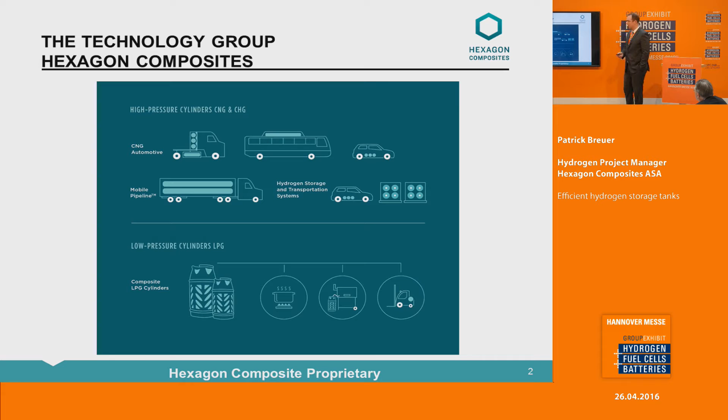But nevertheless, low-pressure cylinders, LPG, are from the historical point of view a very important part of our company, and we provide products to serve all different usages from your barbecue to other applications with LPG.

If you look at the different locations and production sites, Hexagon Composites basically is spread all over the world. The headquarters is located in Ålesund, Norway, but we have also in Norway 2 production sites in Raufoss, which care about the high pressure cylinders for CNG and hydrogen, as well as the low pressure cylinder production.

In the USA, we have another important production site in Lincoln, Nebraska, which is the site with the highest number of employees. They also concentrate on high-pressure cylinders for CNG and hydrogen. The latest entry in our family is a site acquired in Brazil, which hopefully will enable our market entry in South America and the opportunities for hydrogen as well as CNG applications there.

On top of these production or office sites, we also have sales representatives all over the world, in Europe, in Asia, to be the contacts for the customers and serve as a first contact for everybody who's interested in our products. Overall, we had around 430 employees at the end of last year.

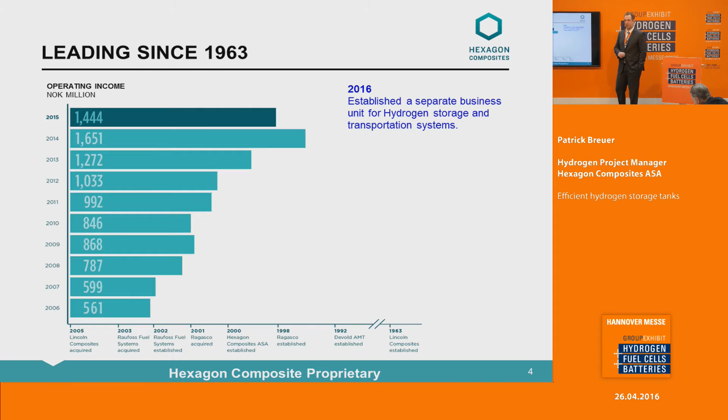One important part of it was that this year we created a separate hydrogen business unit. I will come to this a little later, but this is a strong sign that Hexagon Composites sees hydrogen as a very important future product.

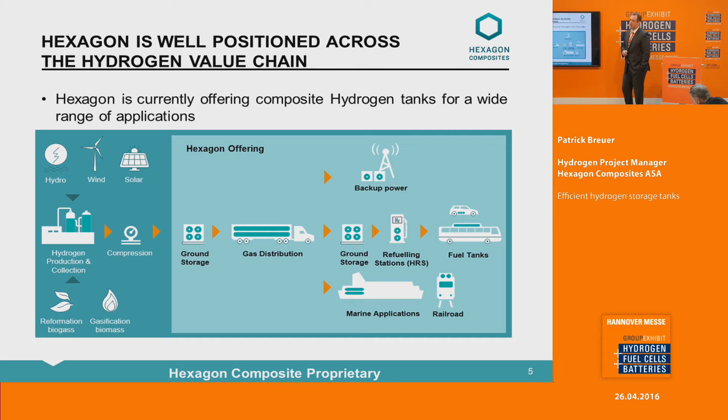Therefore, we would like to have our products spread over the whole chain, from the generation of the hydrogen over the storage to the transportation and finally the usage. That means ground storage, transport, and also the different applications. We would like to have products available for the customers. Here are just some pictures of already available market segments in our portfolio, and I will give you more information on the next slides.

Of course, one important market segment is the fuel cell vehicle market. There's always a lot of discussion about what should be the future source for the electric vehicle. Should it be battery or should it be fuel cell?

Even if we are not directly involved in battery technology, we still think this is a common goal, and both will have their market shares, both are important to exist, and will bring forward clean drivetrain technology. Both technologies have their disadvantages and advantages, so both will have their region or area where they can be successful.

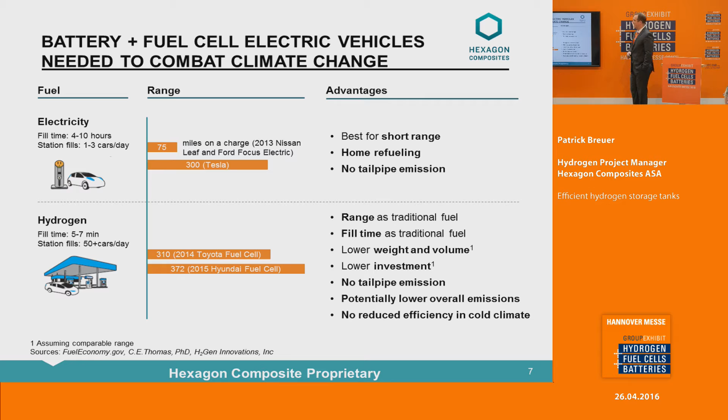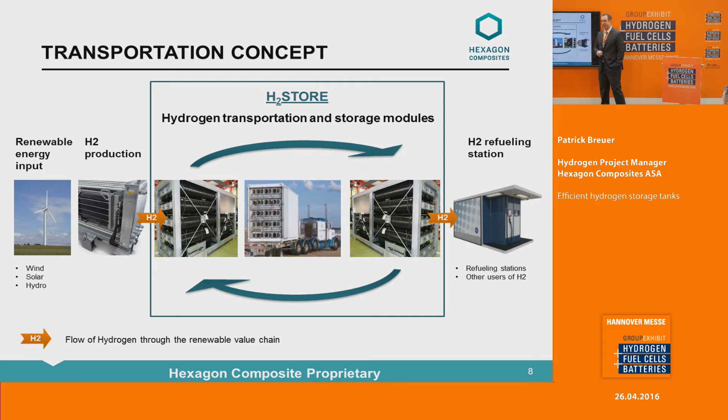If you look at the transportation storage, it of course would be the perfect solution if we have the hydrogen produced by renewable energy, then stored for, let's say, a certain amount of time till it can be transported to, for example, the filling station or wherever the end customer will have their applications. And ideally, this is done by just one module, which can be stored at the production site, transported to the usage, and then also stored on site of the final usage.

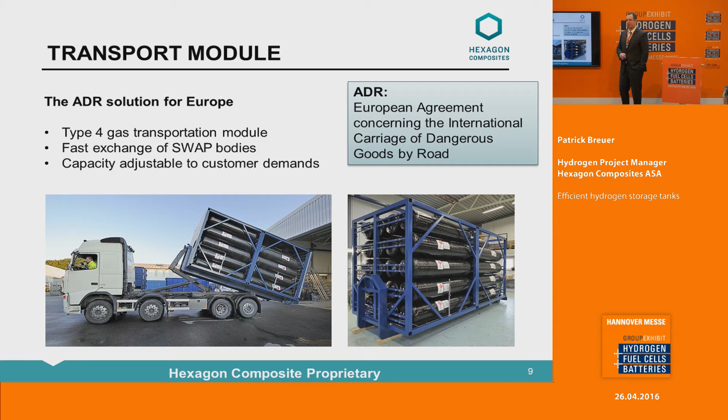And therefore, we have, for example, this transport module developed, which is also, of course, certified according to the ADR, which is the regulation for transport of dangerous goods in Europe. It's a Type 4 tank cylinder storage module, Type 4 with the plastic liner as a permeation barrier. You have the capability to easily transport or locate it on site due to the swap body structure. But it can also be adjusted to special customer needs if necessary.

These are just some values of what a typical SmartStore module can store. We have about 40 cylinders, which gives us a water volume of around 18,000 liters with around 320 kilograms hydrogen at a working pressure of 250 bar. This can be combined, so we can add one or two modules of the 20-foot containers to increase the capacity. And we work with different suppliers on the framework to enable this solution.

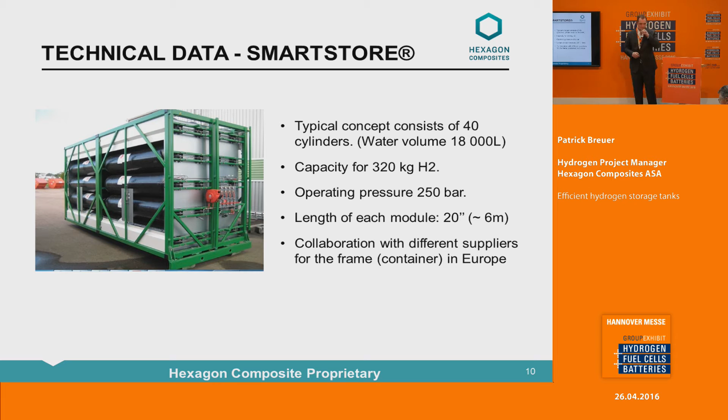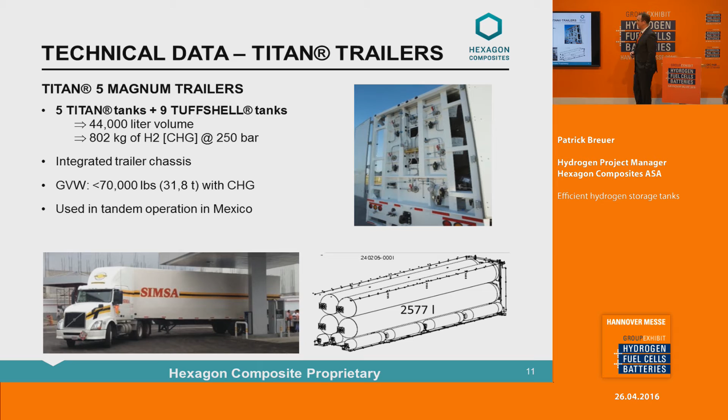As said, this is not in use in Europe, but in the United States, and even in, for example, Mexico, you will see this as a tandem operation. So 2 of these trailers are hooked after each other to increase the amount of gas transported at one time.

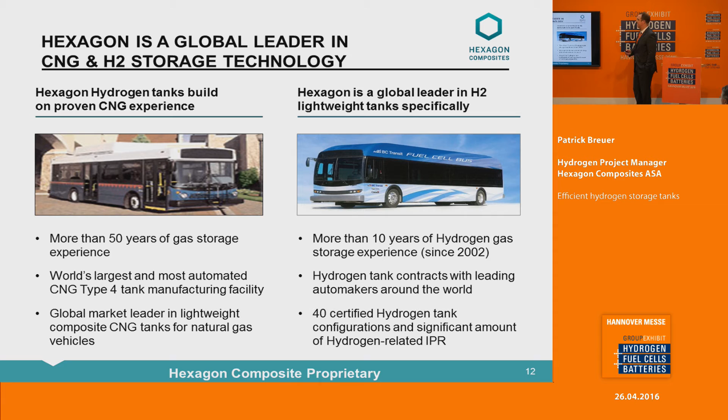Besides the transportable solutions, we of course also look into the final application. Bus storage systems have been a key competence at Hexagon for many years. We have been providing CNG systems to the market for many years already, and we can gain from that experience and the discussions and cooperation with the OEMs in the bus segment, and also establish the hydrogen products in this area. We have been working on that technology for several years and have several tanks certified, always looking for new solutions and increased storage capacity to meet the demands of the customers and also of the market.

If you look into new markets, the backup power application could be a potential growth market. There are a lot of countries that would like to establish or have already established backup power in case you have a loss in communication due to grid outage. Many times it's powered by batteries, but the operators have already evaluated that the hydrogen backup power solution is a more reliable and also more cost-efficient solution. And depending on the location of the backup power, sometimes it's on hills or remote locations. You have to transport batteries or hydrogen tanks, which are much lighter and also less costly, to the locations. And this is definitely an advantage of the hydrogen backup power solution.

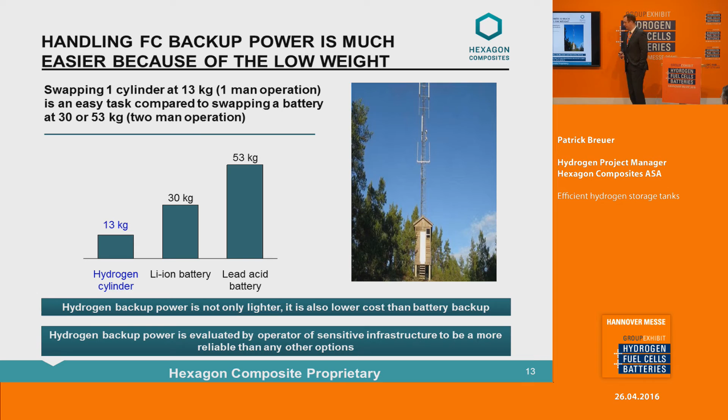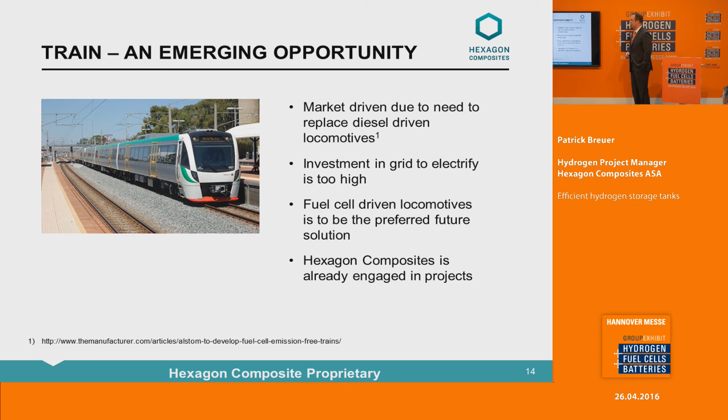Another topic which is more in the discussion are train applications. In every public transport area, they are looking for alternative energies in the train area as well. We already have a high electrification of the train segment, but still some areas where we have to replace the diesel drivetrains with alternative propulsions. And there's of course a reasonable discussion ongoing to exchange these drivetrains not with battery but directly with fuel cell powertrains, and of course then hydrogen is necessary for onboard storage, and we have products available here as well.

Another niche market we hope will get some more opportunities is the marine application. There are already some prototypes available, like the canal boat in Holland, which is already operated with hydrogen tanks from Hexagon. But here too, more and more renewable energy is the goal for the future, and replacing the fossil fuel drivetrain with batteries could be an option, but for that, high power filling stations or high power stations to charge the batteries are necessary, which is again a little bit difficult, I guess. When we have a hydrogen economy coming up in all areas, larger scale hydrogen filling stations can be available for marine applications too, and here we already have products available for that market.

To give you some ideas of our product range and what we can provide on cylinder sizes, we have here some different cylinder sizes available. I start with the transportable cylinders I've mentioned in the SmartStar module with rather low pressure. Then we have the heavy-duty applications, which start with 350 bar working pressure, rather large, long tanks used mainly on buses, but also other heavy-duty applications.

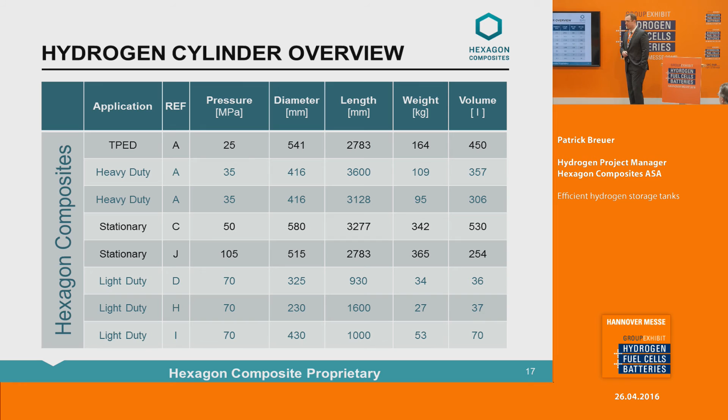But also for the fuel cell vehicles, we have different solutions already certified and available. So this can be purchased by the customers and used in their application as well. So to give you the overview, for the different applications we have products in place. Of course, the largest market potential we see in the light duty and bus truck market. But definitely, when we increase the hydrogen economy landscape, also other market niches like backup power or gas transport will come in place. Infrastructure, of course: without infrastructure, no fuel cell can be operated. So here we also see in the growing market a very good opportunity.

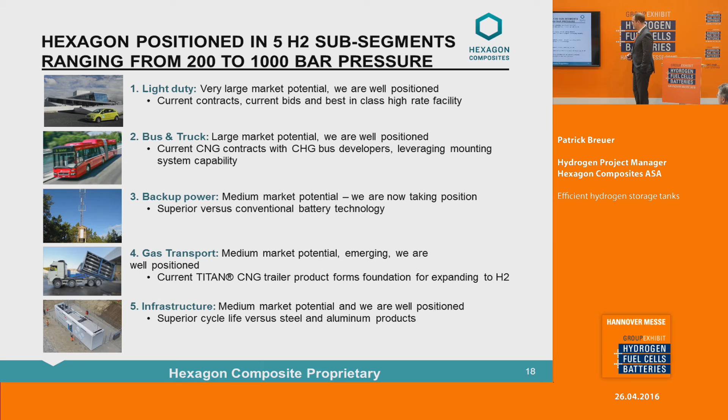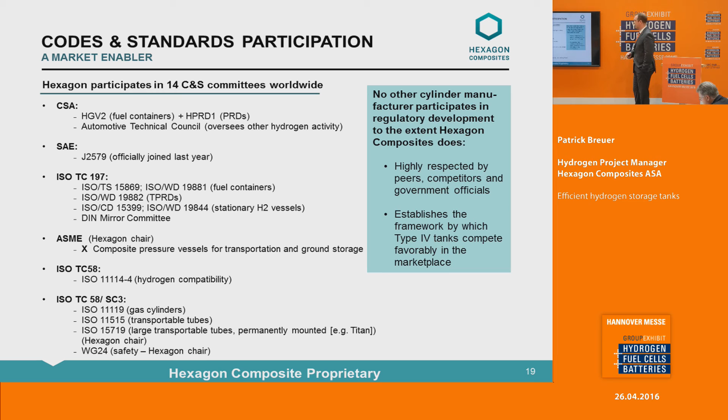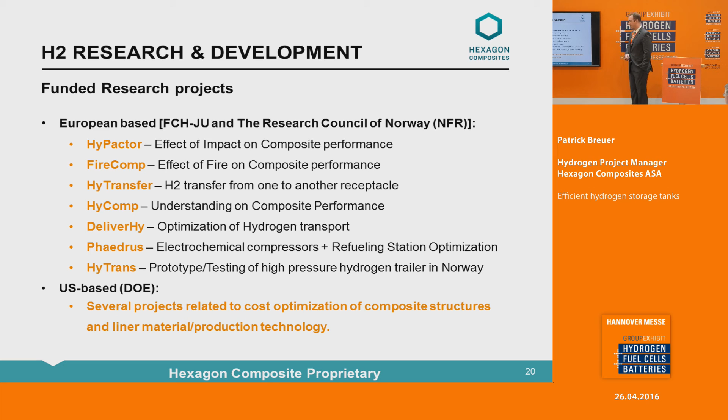Furthermore, research is a very, very important part of our strategy, because if you don't do new developments, if you don't improve your products, you will sooner or later lose your market. And so we are heavily involved in European funded projects, mainly funded by the Fuel Cell Hydrogen Joint Undertaking, but also by the Norwegian Council, and also from the DOE side we are involved in several projects as well, all dedicated to improving the product or understanding important safety aspects like impact, fire, or other means.

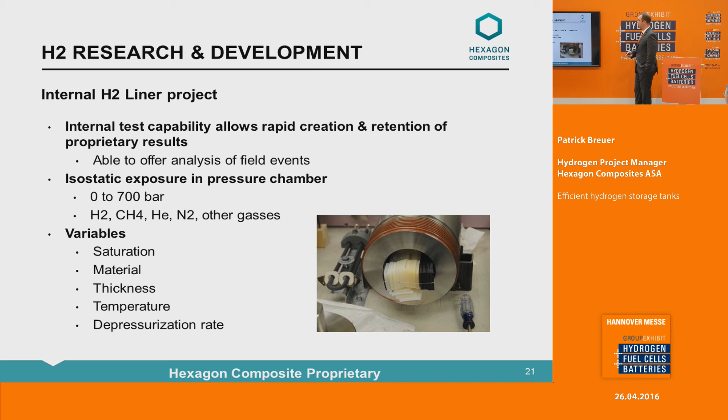So finally, to summarize the activities at Hexagon: very important for us, we have established a separate business unit for the hydrogen activities to have a growth in the niche market, but of course also strengthen our current already available market applications. We see that still the fuel cell vehicles have the highest importance and will be the most important market for our products. But as we increase the hydrogen economy, also the already mentioned niche markets like marine, rail, and backup power will be our future.

We have already demonstrated that our technologies are able to perform safely and also reliably. So we have a good base for protection of our profitability and market share, and hopefully increasing this as well. And therefore, we see hydrogen as the future for Hexagon.